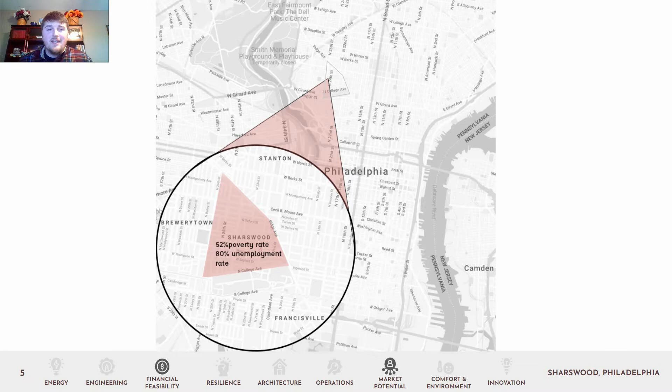Over many years, the people of Sharswood were denied home loans and financial help from banks and lenders to support new development or improvements within this neighborhood. This has led to many rundown and abandoned single-family homes. These racist redlining practices have since ended, but the financial impact remains. Sharswood's poverty rate is above 50% and its unemployment rate is 80%.

Because of this, people are living paycheck to paycheck, and nearly 70% of Sharswood residents are renters, with the majority of building stock built before 1940 and limited funds for upkeep. The value of existing properties continues to go down for those who are homeowners. In our meeting with the community, we heard a resounding need for homeownership and the ability for residents to age in place in the neighborhood where they grew up.

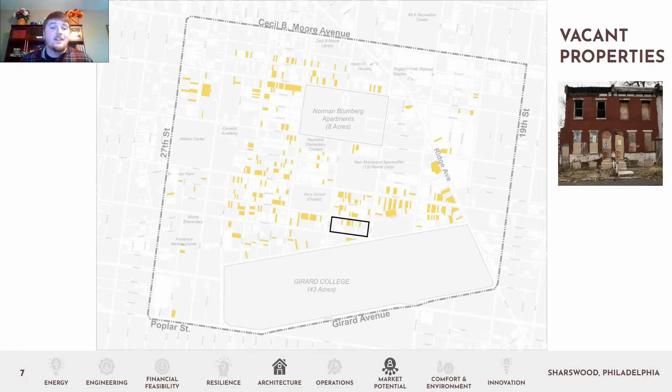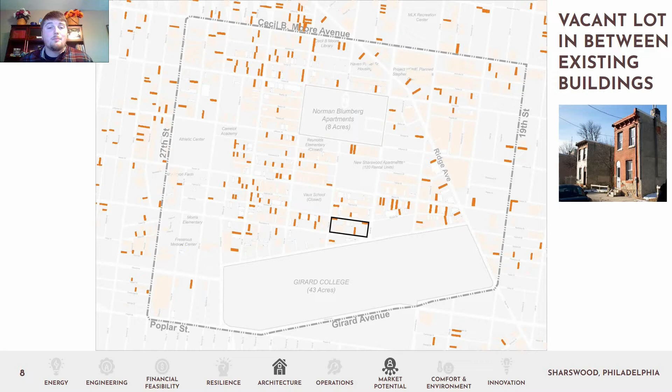Sharswood has almost 250 vacant existing homes, which, if renovated, could become a place where existing renters can have a forever home. This allows them to stay in the area where they were born and raised. In addition to the vacant homes, many blocks have gaps, which we call missing teeth, between two row homes where one was torn down. This exposes the party walls on either side, increasing heating and cooling costs for those residents along with more chances for water damage. We have identified these lots as opportunities where new development can support existing homeowners.

PHA has designed a rehabilitation plan for Sharswood, but their plan requires entire blocks being razed and rebuilt according to their standards. Because no block is completely empty, this involves invoking eminent domain on vacant homes as well as occupied homes. Homeowners are compensated, but according to accounts from the community, that compensation could be as low as a few thousand dollars for an entire home. PHA is then providing affordable rentals, but not only is their waiting list so long they can't possibly rehome everyone they displaced, they're turning homeowners into renters, which only reinforces the cycle of poverty and instability.

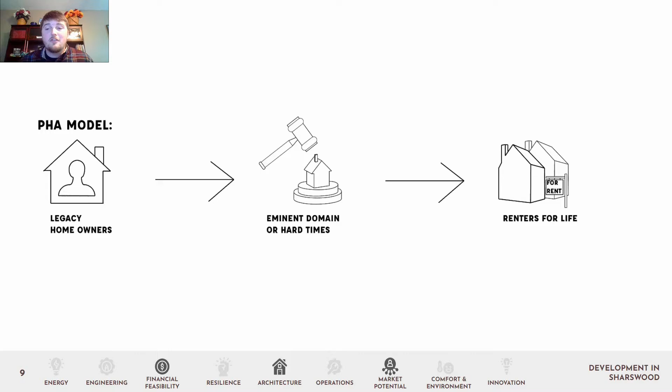While residents of Sharswood struggle to make ends meet, new development coming in from Brewerytown to the west is causing property taxes to rise. One of the major driving forces and takeaways from a community meeting for our project was the past developers that had come into Sharswood and taken advantage of the financial status of the neighborhood. The people of Sharswood are so passionate about their community and are willing to defend their community and stand up against developers and other outsiders coming in.

These developers are coming to neighborhoods and not taking any of the community into consideration, only the profit they receive. Building codes are being pushed to their limits and communities' wants and needs completely disregarded. Hearing these needs, we made a goal of our project to change how economic development works in abused neighborhoods like Sharswood. Designing a new model for low-income home ownership supports multi-generational living and allows current residents of Sharswood to age in place. Through this process, we found that while designing net zero affordable individual homes can have an impact on one family, attached housing can have an even greater impact when we reconsider how development can occur at the block scale and even city scale.

By designing a system of development in which new construction is paired with renovations and linked to an entire grid of solar and water management, we have discovered a way to fund low-income housing while encouraging a mixed-income neighborhood that retains and upgrades existing building stock, fulfills the same needs for new development, and proposes a new way to manage water and energy at a city scale.

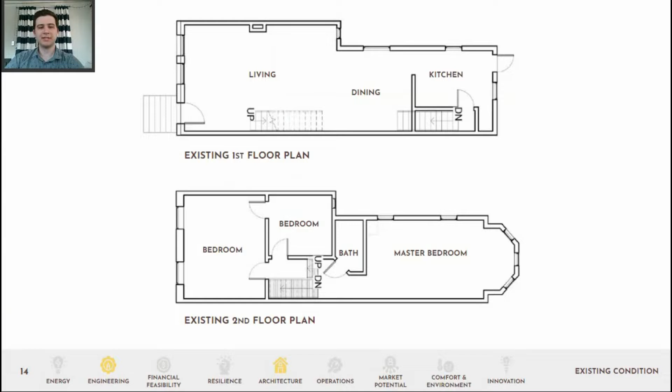Together, we agreed that designing a net zero energy retrofit for the building would be an excellent pilot project for the CDC. Essentially operating as a mini firm alongside professional architects, engineers, and industry partners, we hope this project will set the stage for sustainable, affordable development across the neighborhood.

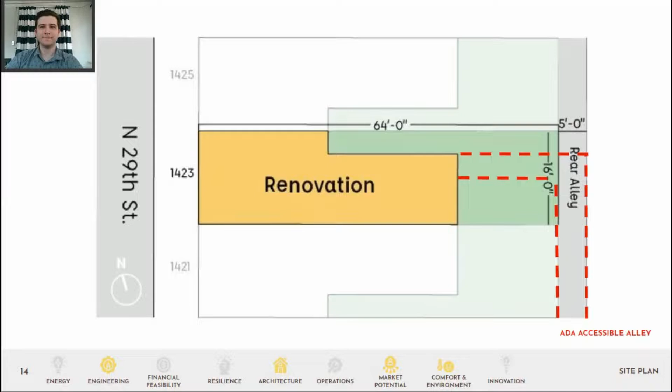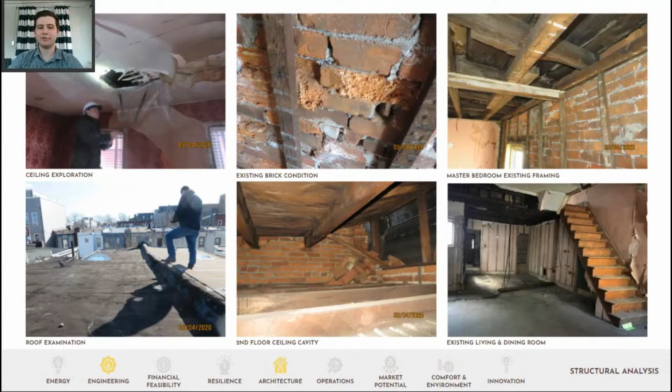Working with engineers from Wiss, Janney, Elstner Associates, we spent time opening up and examining the structure both inside and out in order to find if anything could be deemed salvageable. Our analysis led us to the conclusion that the majority of the structure needed to be replaced.

In response to the building's existing thin, crumbling brick party walls being unable to structurally support the pocketing of new, larger joists, we developed a scheme that allows a totally new structural system that is entirely independent of the building's shell. The floor joists are supported by 2x4s that are framed next to the party walls. This method allows us to avoid the brick while also allowing for electrical runs and added insulation.

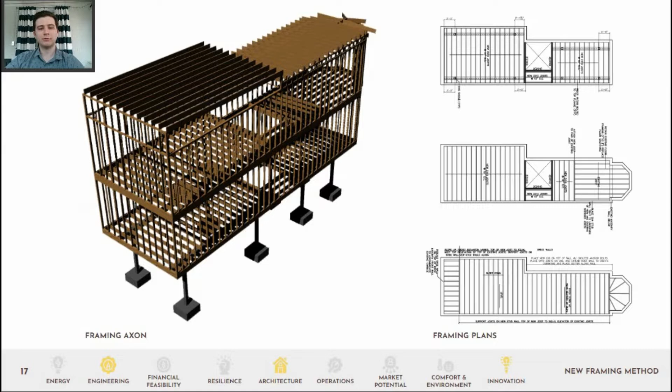The new framing scheme rests entirely on 4 I-beams. These are supported by 8 square steel columns, each with a new footing placed 1.5 feet away from the basement party walls. Reworking the framing scheme allows us to address a drainage problem on the roof, sloping the back section of the home towards a gutter. This not only prevents roof damage, but will make it easy for the home to be connected to a rainwater collection system if the resident so chooses.

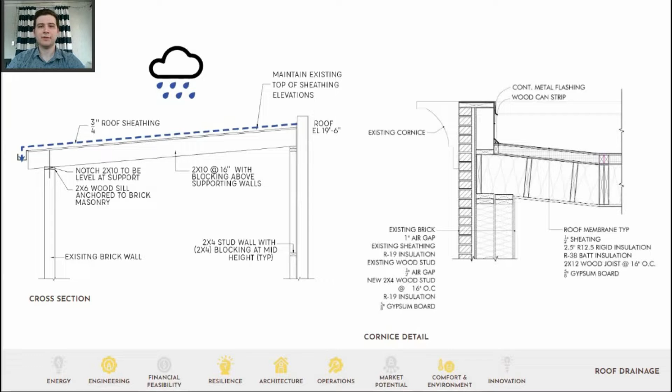The insulation along the party wall is mainly for acoustic purposes, as the homes next door are occupied and provide a sufficient thermal barrier, but gives the project a level of resiliency in that it maintains a thermal barrier in the event that a neighboring home were to be abandoned, catch on fire, or be torn down. According to our energy analysis, the walls exposed to the exterior require an R value of 30. Our research led us to insulate on the interior of the brick using Havelock wool insulation.

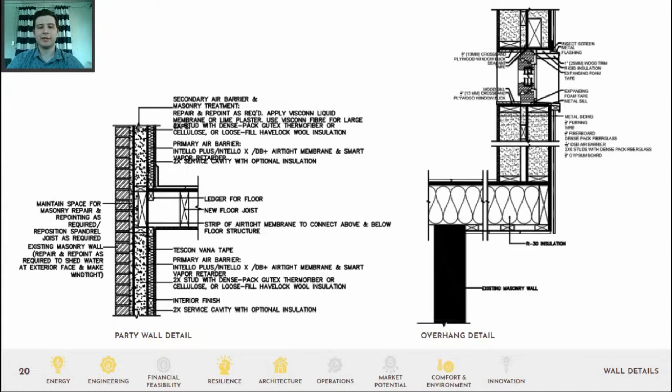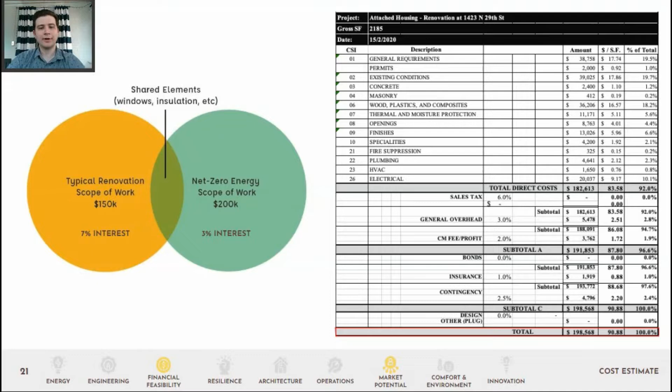With a modest budget of $200,000, we designed the home to be as airtight and energy efficient as possible while discovering ways to make the project affordable through material choices, as well as clean energy fund financing, which gives the project a lower interest rate for sustainable elements.

Following talks with our client Darnetta and red lines from our onboard licensed architect, we developed a new scheme that includes 3 bedrooms and 2 full bathrooms on the second floor and a half bath on the first floor. A flexible space is included in the rear of the ground floor that can be used as a home office, a play area for children, or most importantly, can be converted into a 4th bedroom for a mobility-challenged family member.

This design decision is in response to the community's calls for accessible design and the need for elderly family members to age in place in an environment that is dignified in the neighborhood they grew up in, and all on one level. A large half bath is adjacent to the space and leaves room for a homeowner to convert it into a full ADA accessible bathroom later.

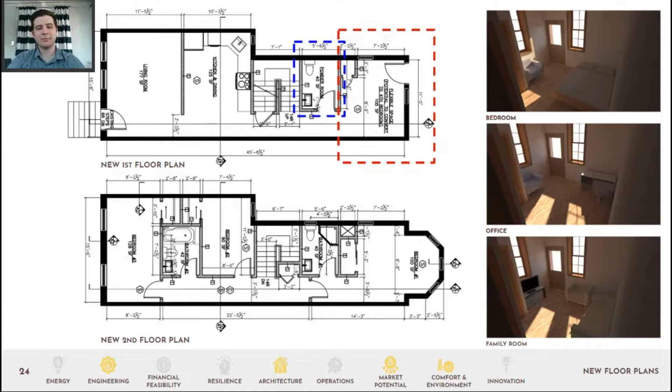Accessibility is a huge issue in many row homes because of the traditional 3-foot stoop, but the back entrance is only 5 inches above grade due to the slope of the block. Thus, the back entrance can be used as an ADA entrance with the addition of a ramp.

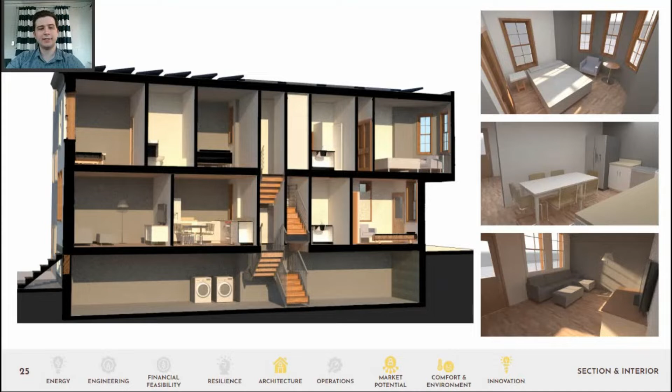All of these measures seem small, but will have a huge impact on the quality of life of a person who may be confined to the upstairs of the row home or rely on another person for mobility. So in addition to creating this social and economic resilience, the home can function entirely off the grid by producing more energy than it needs.

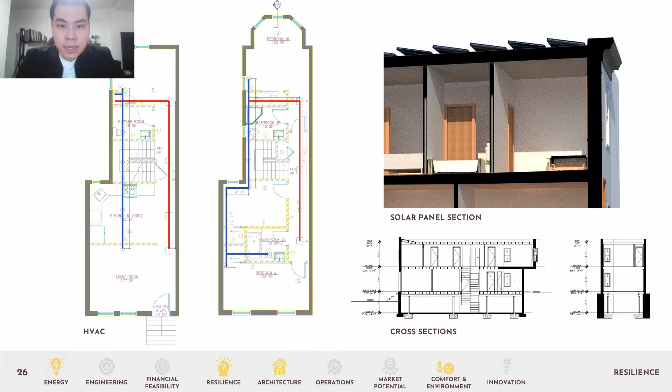It does this through implementing net zero energy construction strategies, such as making the interior side of the envelope airtight by a well-insulated wall and using the ERV systems to transition the air from the inside out, and to achieve the high thermal performance. In order to make sure the building would achieve similar performance value whether located on north, south, east, or west, we ran a series of tests through a software called cove.tool, an innovative cloud-based software that generates building performance through energy modeling.

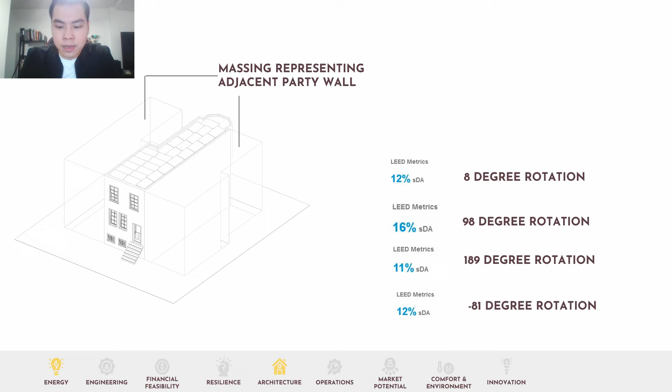For light penetration, the building is oriented in 4 different directions, and the results show from cove.tool that even though the building is facing different directions, the light penetration will not affect the building envelope performance drastically. To achieve an efficient EUI value, the building uses an R value of 50 for the roof and R35 for the exterior envelopes. The building will also be equipped with triple glazed low E windows to decrease the EUI.

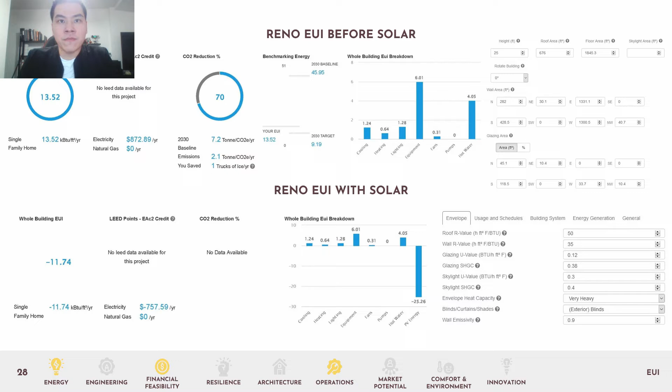After running a series of simulations, we reached the lowest EUI value of 13.52. In addition to excess energy produced through solar panels, the building is expected to have an excess of around $750 worth of energy per year. Okay, so now moving on to the urban infill model.

We initially set a goal to sell the infill for $600,000 and designed the plan so that the amenities are in line with neighboring new construction projects. When we designated this price, we compared the selling price to the surrounding area to ensure that this was justifiable and not out of reach, and after analyzing similar properties, our selling price is very tangible.

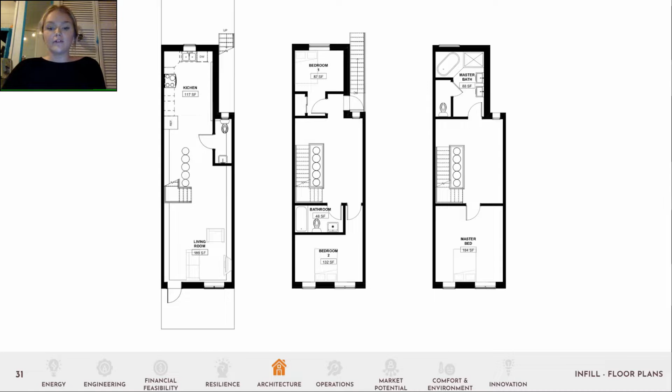The infill model has 3 bedrooms, one being a large master suite taking up the entire 3rd floor, and a large light well through the entire unit in the center. This will make the project unique and stand out while also increasing its value. The infill model is designed for the scenario with the toughest design constraints on our site, fitting into the smallest lot, 14 feet wide, that could exist between existing row homes.

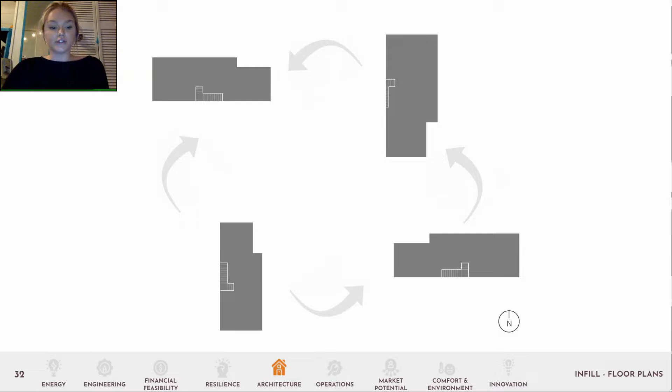Our infill design will be rotated on the 4 different cardinal directions. This allows for our infill unit to have the same floor plan, just enlarged to fit within the larger site in a different cardinal direction on our block. This would only have small differences, specifically within the allowances on the interior spaces. The infill model also uses an advanced framing technique that increases the R value, reduces material waste, and provides wide 4-foot windows that also allow for more light into the space.

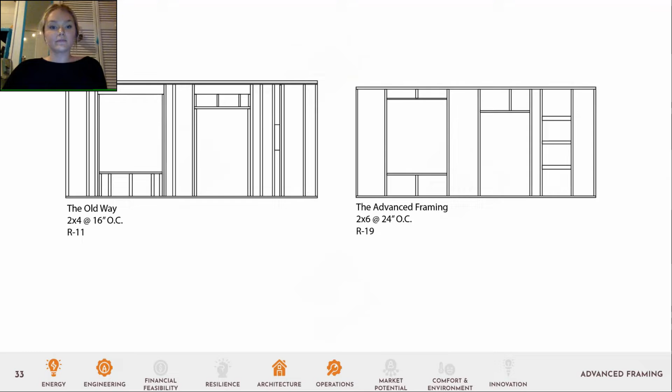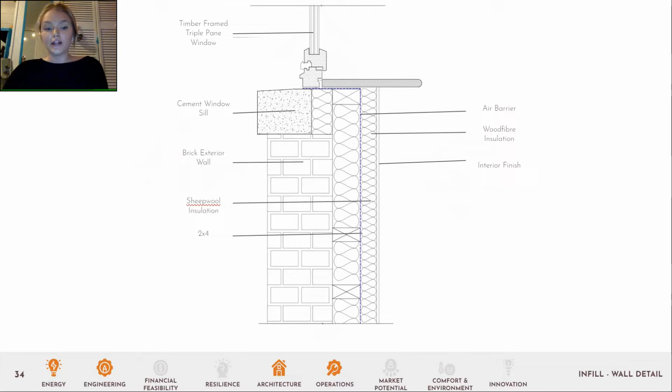The details for the infill are similar to the renovation as we've used consistent materiality. The only difference between the two is that the reno has thinner party walls and thicker exterior walls. Another main difference is in the framing and exterior cladding.

The target market for this design is someone coming into the neighborhood. This kind of luxury row home is similar to the development already occurring, but our design aims to take advantage of that and use the profit from newcomers to support the cost of selling the renovations at a lower rate than it costs to construct them. This not only provides more net zero housing in the neighborhood, but it also supports a mixed income community and turns renters into homeowners. After our cost estimation was finished, we've concluded that an individual infill will cost approximately $371,000.

This model uses repurposed pipes that hold the water used within the property. We designed a system for water collection and reuse that captures heat and reduces the load on the hot water boiler.

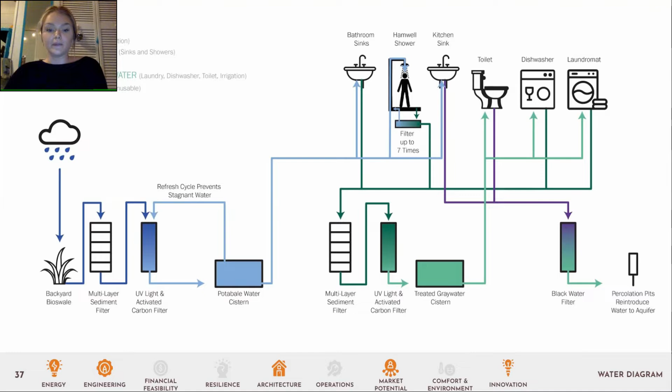The infill model uses an innovative filtration system to capture rainwater from the roof as well as from the street, suggesting that whole blocks could manage street water and then use it on site. This exceeds the water needs of the household while eliminating runoff into the combined sewer system. This makes the home more resilient because it's not reliant on PWD and it uses less energy. The water is then drawn up from the basement and reused within the unit.

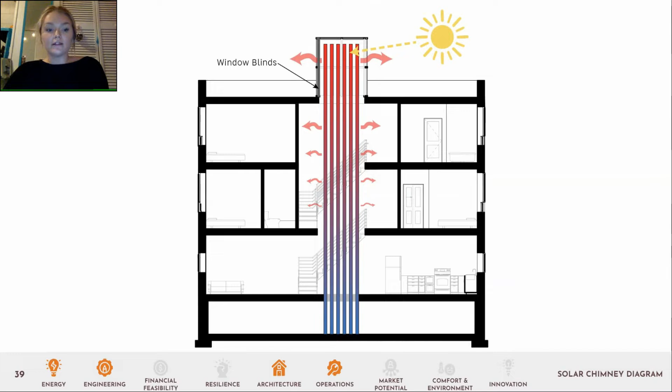We have also included other capabilities within the unit aside from water. Highlighted is the light well that also serves as a solar chimney, which helps us achieve our more ambitious energy goals with passive ventilation. In the winter, the water pipes not only serve as water storage, but also help mitigate the heat loss from the solar chimney. By having the pipes a darker color on the south, the sun will help to heat the space. This is also supplemented by window blinds on the north to help take advantage of the sunlight.

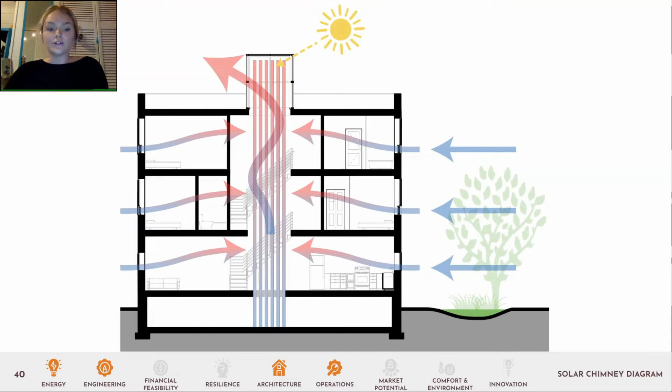During the summertime, the solar chimney also reduces energy loads and provides a passive ventilation strategy that is supplemented by an ERV/HRV. Extra cooling will be provided by the backyard bioswale, and sensors will detect optimal temperature differences to automatically open the top of the solar chimney for ventilation. Our solar chimney is supplemented with an ERV that dehumidifies the house during evenings and hot days and then serves as our HVAC system, once again collecting cold from the bioswale in the backyard to combat the hot and humid summers.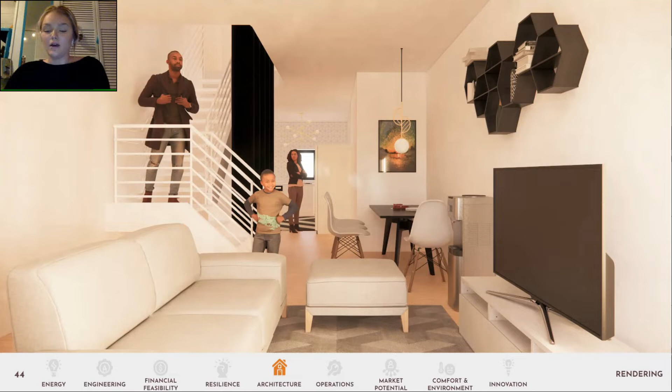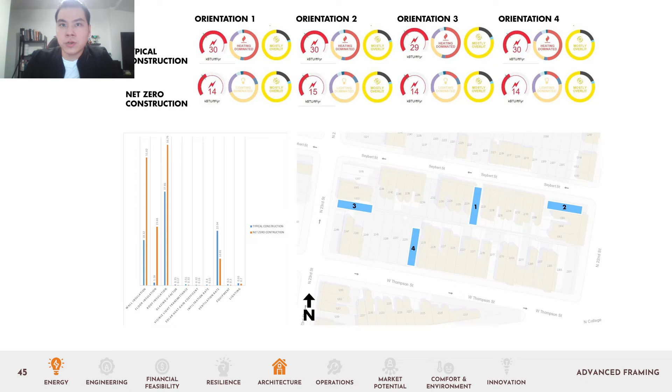Our aims for this unit are to have plenty of natural light and to make the space very comfortable for all the residents. Using the same energy modeling simulation strategies as the renovations, when evaluating the infill unit on all 4 cardinal directions of our blocks, the house will have an EUI of either 14 or 15 compared to typical code standard constructions, which have double the EUI value of 30. So based on the energy simulation, increasing the R value for the wall and roof to an extent did not reduce the EUI value of the building drastically. An R value of 35 for the wall and 50 for the roof are enough to satisfy while saving costs.

With smart integrated sensors and Energy Star appliances being a factor in the simulation, it generates less power consumption. Triple glazed windows with a U value of 0.15 and solar heat gain coefficient of 0.38 were used for the simulations. The U value and solar heat gain coefficient also did not make a difference according to the simulations. With the excess energy produced by solar panels, a typical 14 by 35 property in Philadelphia can expect to generate almost $600 a year in excess energy.

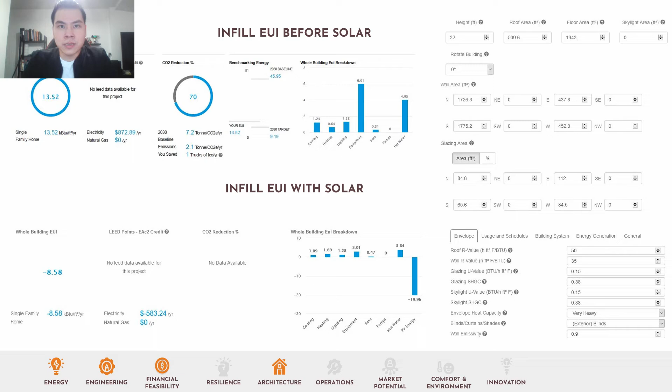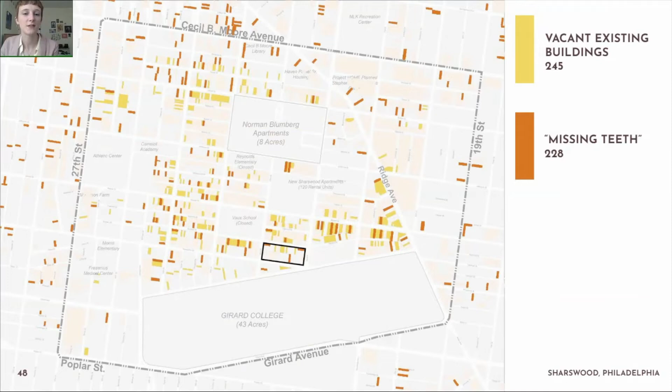Individually, these models can be propagated all over the neighborhood. Our infill model can fill in 228 vacant lots between buildings, and 245 vacant properties can be renovated to produce a net positive energy balance, as well as heavily reducing the burden on water management in the city. Row homes make up 60% of housing in Philadelphia, as well as a significant portion of building stock nationwide. Our individual designs have the potential to transform attached housing development and renovation across the city and even the country.

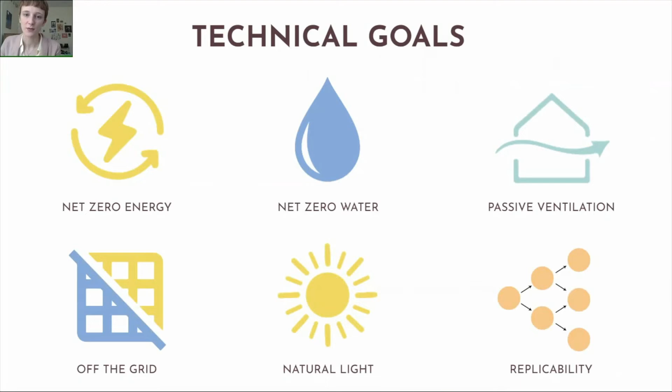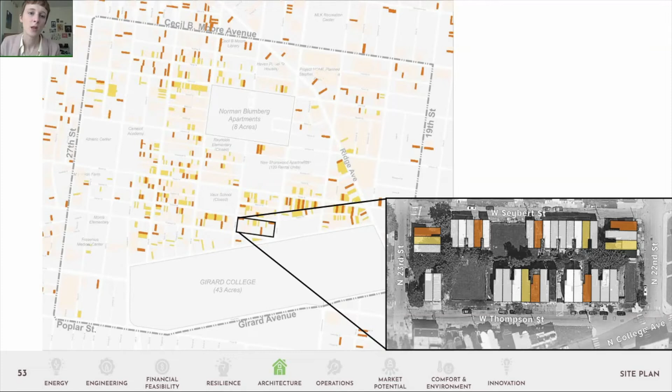In addition to our technical goals of being off the grid for both water and energy, we also set social, economic, and cultural goals based on our meetings with community members. A single net zero energy row home can improve economic stability and quality of life for one family, but we wanted our project to have the potential to impact the entire community of Sharswood. We set out to do this through a block scale intervention that combines infill and renovation models for a total of 12 units. Our plan for 6 infill models and 6 renovations sits just 1 block north of Girard College.

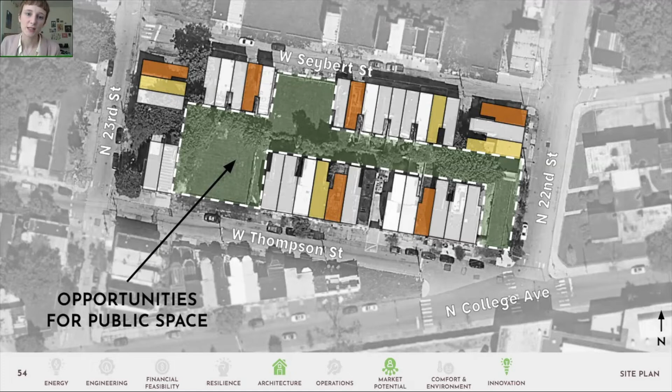We began by filling in gaps between existing buildings, leaving large open areas for public shared space and back-of-house access. This led to the design of a shared backyard model that connects these open spaces, increasing accessibility while providing community space and resources that increase social and economic resilience, food access, air quality, and public safety.

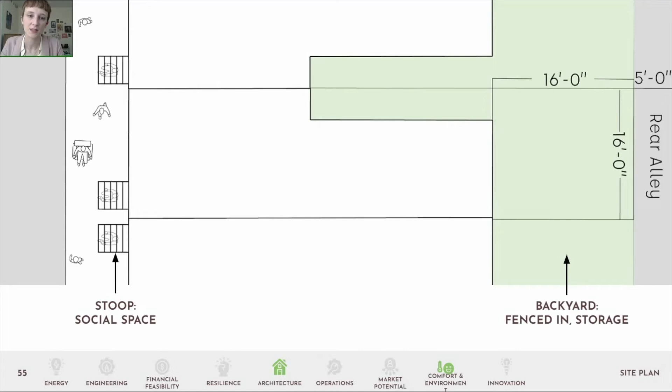The idea for a shared backyard stems from an obvious waste of space in existing Philadelphia city planning. Lots are required to leave 25% open area, but because there isn't much space to move around, these tiny backyards are often neglected, used for storage, and fenced in. Instead, the front porch, stoop, and sidewalk have become the cultural playground in Philadelphia. In Sharswood and many North Philadelphia neighborhoods where city planning does not allot space for public parks, this means there's not much green space for residents to enjoy.

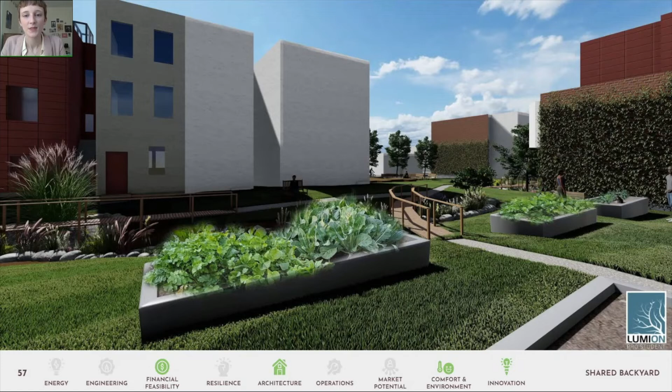To utilize this wasted space, we developed a backyard buyback program in which residents would still own their backyard, but receive a subsidy from the Philadelphia Water Department to take down their fence and offer a portion of their land for shared space. This becomes a safe, sheltered area for the residents to gather, cook together at shared grills, grow produce, and build a sense of community. This model is inspired by co-living models where shared spaces are looked after by everyone, which encourages residents to have a sense of pride in their neighborhood and to get to know their neighbors better.

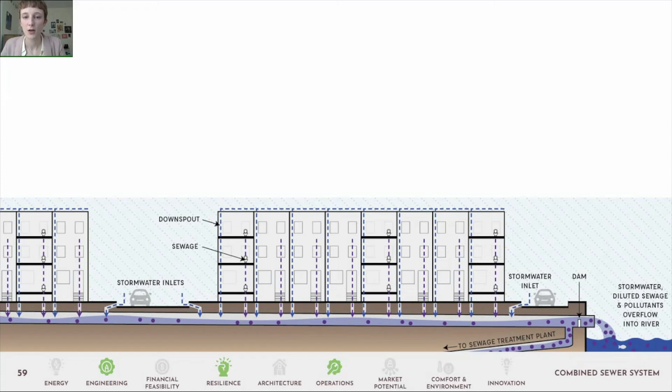This shared backyard space also provides a solution for the rainwater management problem in Philadelphia. The current sewer system is combined with rainwater runoff, which means that every time there's a major storm, the sewage overflows into the Delaware River. The city pays so many fines to the Environmental Protection Agency every year for violating the Clean Water Act that it actually has a budget for that purpose. This contaminated water is the city's main source of potable water.

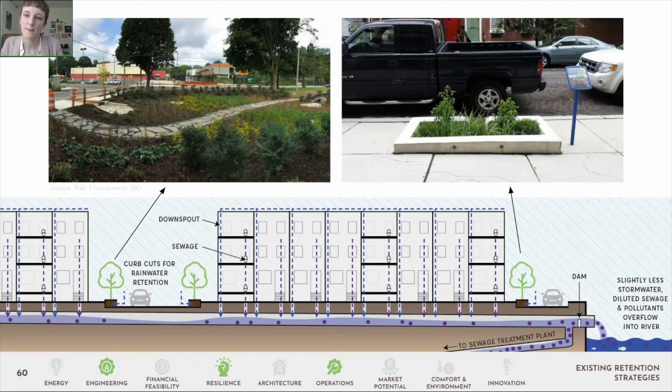The City of Philadelphia recognizes the flaws in the current system and has proposed some strategies for rainwater retention. Curb cuts from the street feed into rain gardens, which vary in size and are funded from the same budget that pays fines to the EPA. However, these strategies do not address the runoff from buildings and are few and far between.

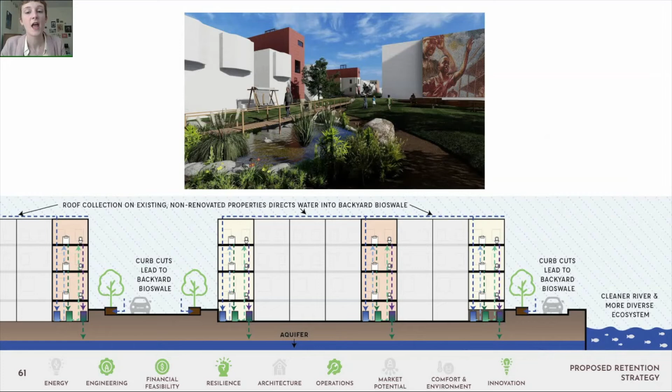Our design proposes a new model for water management in which the city block can become a tool for rainwater collection, filtration, and retention, which will eventually lead to the closure of the combined sewer system and the rejuvenation of our city's rivers, saving the city of Philadelphia thousands of dollars in fines per year. Using the most advanced water modeling program in the world provided by our engineering faculty at Integral Group, we determined that roof collection alone is enough for each unit to have a positive water balance on an average year.

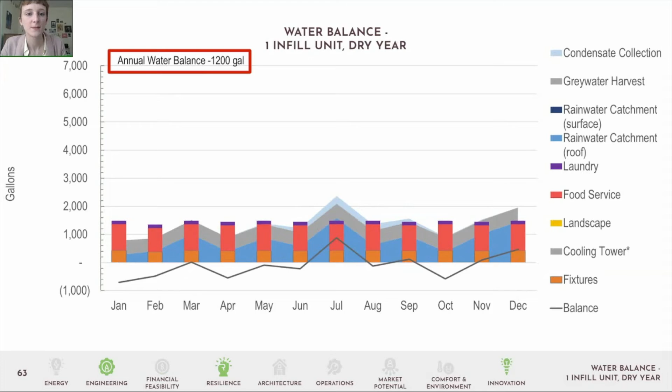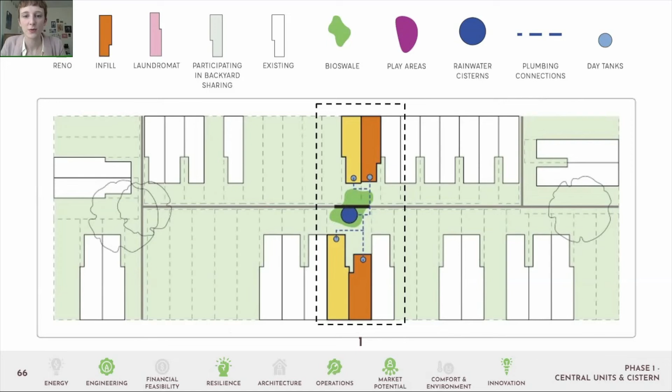Integral Group's advanced computing system takes into account wet and dry years to determine the optimal cistern size so it is never empty. Using this tool, we determined that 12 units would need a total storage capacity of 37,500 gallons. The block is phased into 3 sections of 4 homes, each with their own 12,500 gallon tank that is integrated into the landscaping. Each unit includes smaller day tanks for potable water and treated water, which are easier to maintain and hold enough water for about a week's worth of usage.

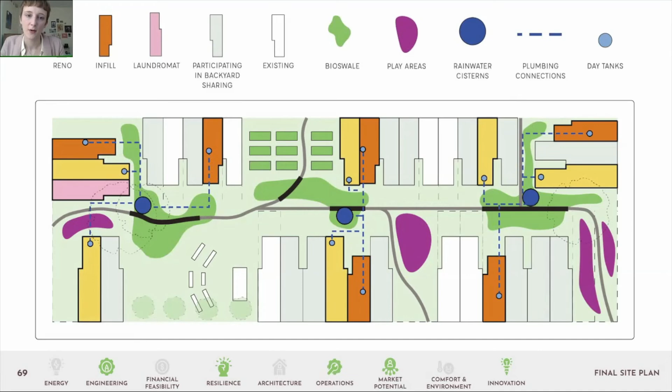Adding new amenities such as play areas and parks in each phase helps convince neighboring properties to participate in the backyard buyback program. In the final plan, it is assumed that 80% of the block will opt into the program, allowing space to connect the bioswales. Block operations are powered by panels that are entirely off the grid, with a battery located in an existing vacant property which we have identified as a potential location for a laundromat.

Laundromats are community hubs in many Philadelphia neighborhoods, so we hope this will build a sense of community while also reducing our water usage in the units. The second floor is a flexible community space that can double as a satellite office for the CDC, making operations easier for the whole block.

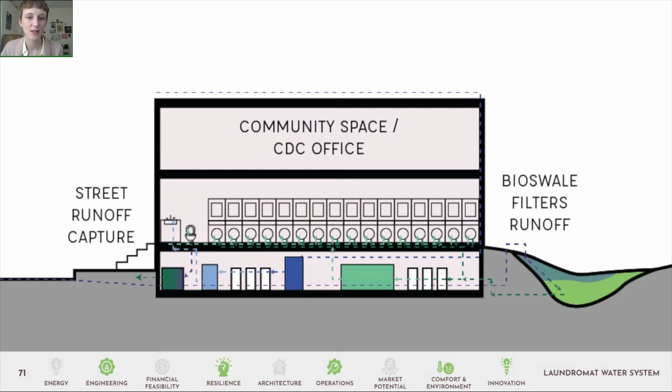The laundromat's water supply is a separate system which diverts runoff from the street and through the backyard bioswale. This bioswale becomes a collection location as well as a first layer of filtration before the water is pumped through a series of filters and used in washers. Local flora helps retain and filter the water and doubles as a carbon sequester, which cleans the air for the whole block. This system has a positive water balance of over 30,000 gallons per year, even with 16 washers.

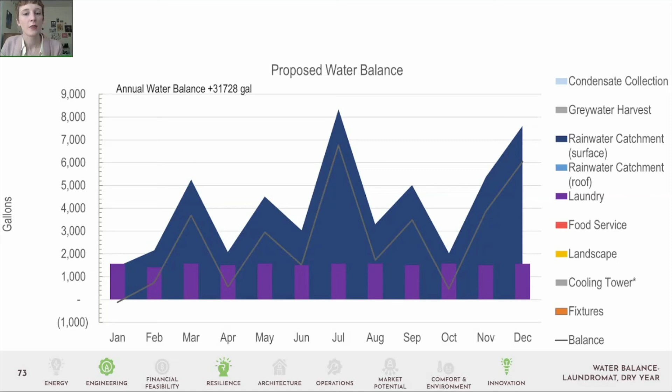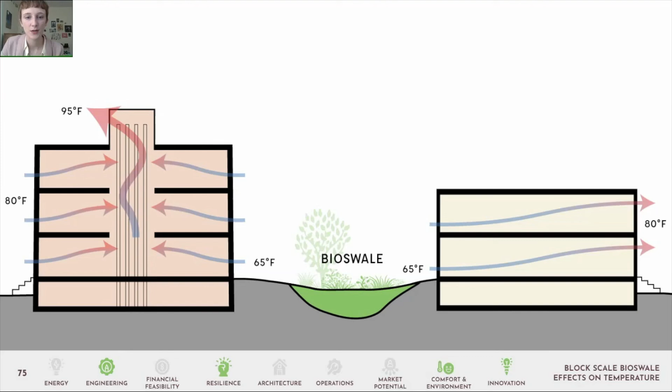This shows the enormous amount of water runoff that's going to waste every year and contributing to the contamination of the Delaware River. This excess water will be retained and reintroduced to the aquifer through percolation pits in the bioswale. We initially proposed this bioswale in the backyard of the infill properties as a source of cool for the solar chimney. At the block scale, this bioswale can then run through all the yards participating in the backyard buyback program. This creates a cooler outdoor environment which actually improves the performance of all the existing buildings as well.

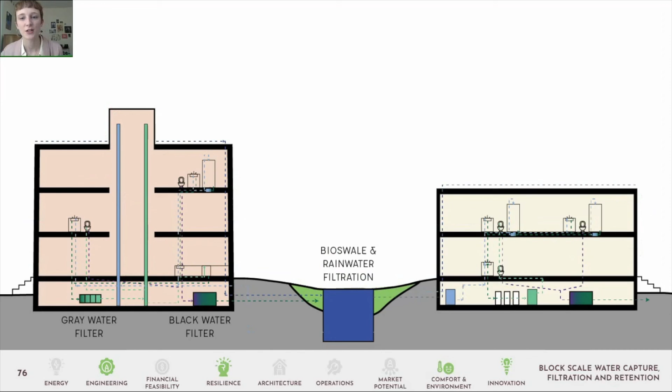If the water department made it a priority to retain water in backyards on every block while converting existing and new homes to a rainwater capture and reuse model like the one we are proposing, the aging sewer infrastructure could eventually be retired and water quality in the river would increase over time.

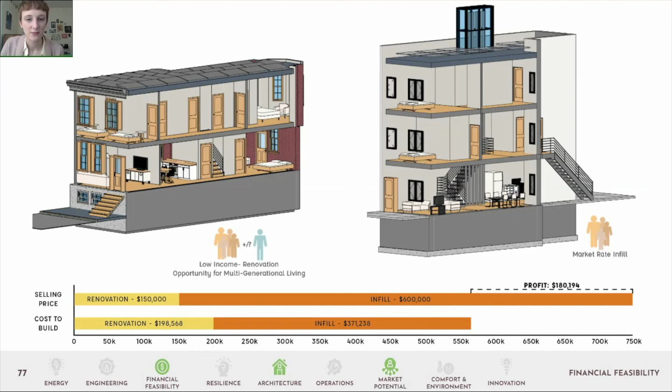We recognize that all of these elements come at a price, so we began to design a business plan in which a portion of the profit from selling an infill model at market rate is able to bankroll an affordable renovation. The net profit from a paired infill and renovation is about $180,000. Although this is successful, it does not leave room for revenue growth. Adapting that core concept, we designed a growth model in which profit from installing solar panels around the neighborhood will be able to fund construction and exponentially grow the profits and the capabilities of the CDC.

Beginning in 2021, the CDC will become a solar company. The cost of installing solar on an existing home is about $5,000, which is an extremely low number due to the capability of the CDC to utilize workforce development training as an inexpensive installation tactic. The CDC can then afford to sell energy to homeowners at a lower rate than the Philadelphia Electric Company, while selling excess energy back to the grid. After 2 years, these panels are paid off by their own yearly revenue, and the CDC can borrow against the expected income from the panels to fund building construction.

When construction is finished, profit from the infill model will pay off these loans while netting a profit for the CDC. Investing a portion of this profit into more solar for the neighborhood will increase the CDC's assets, allowing them to borrow more money and increasing yearly revenue. This model propagates, with solar installations increasing the CDC's borrowing capabilities, and profits from construction increasing solar installations.

After 5 years of this, the CDC is then capable of financing the model which we are proposing at the block scale. By owning over 62 solar arrays, the CDC has the capability to borrow against these for $1.2 million, which is the maximum loan from Reinvestment Fund's Clean Energy Fund. This supports 2 infills and 2 renovations. After operations costs, this leaves the CDC with a profit of over $200,000 to do with what they wish. Excess profit can be used to bankroll an additional renovation, provide solar to 40 more homes, used as a safety net or for debt forgiveness, or it could go into other community improvements.